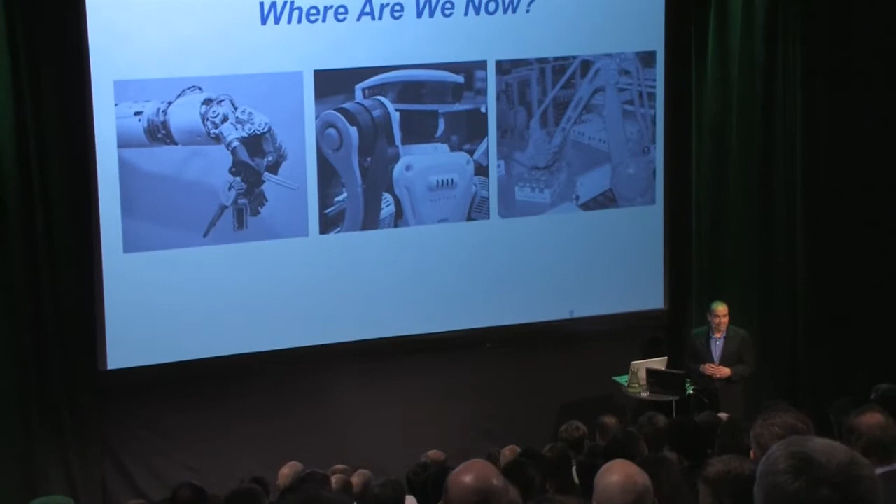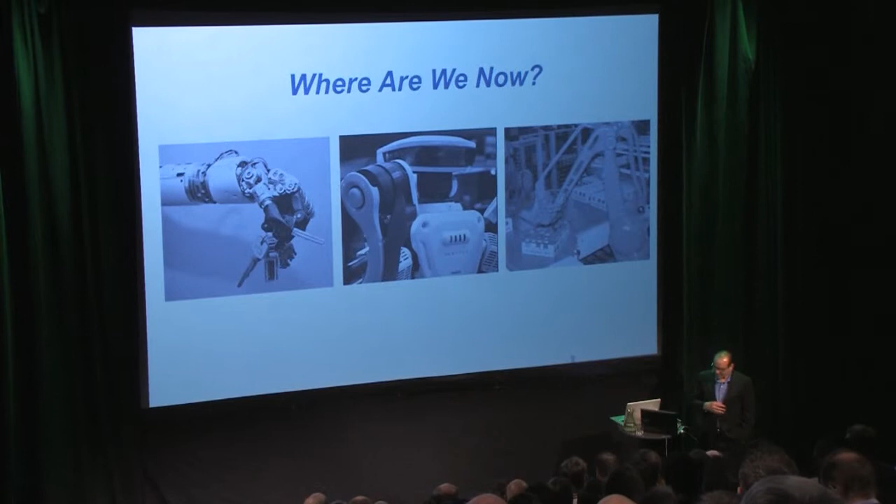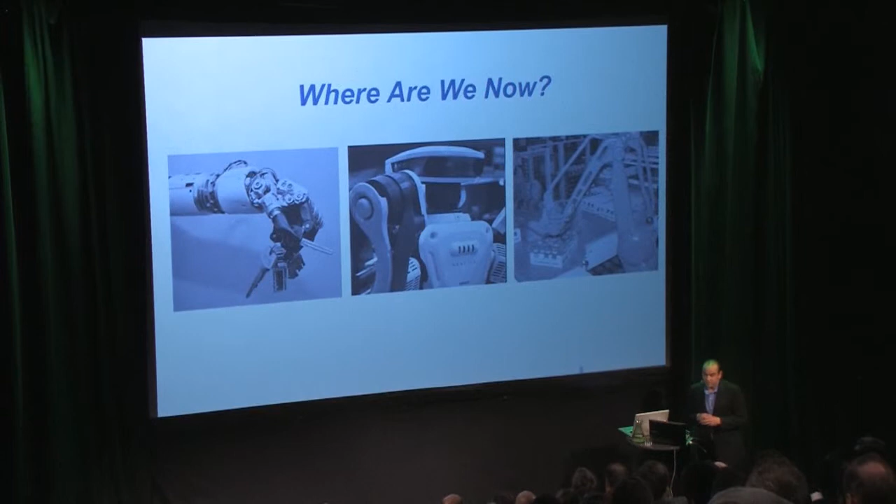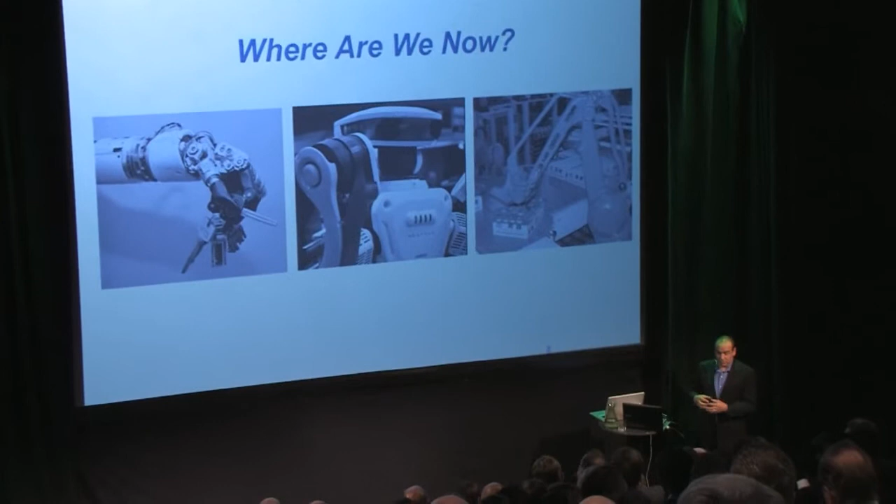So in the next 20 minutes I'll give an overview as quickly as I can on the complete robotics industry. Where are we now? I titled that after a song from the latest David Bowie album, because he's a bit further along in his career, and robotics is similar in that sense. It's one of the few areas of technology that's extremely immature yet has been around since the 1960s. So how do you classify this? It's classified as an emerging technology and a mature technology at the same time. Given I want to do this in 20 minutes, let's get started.

I want to talk about four subjects here. Where are we right now with respect to robotics? What are the enablers? What can we expect in the near term? And then finally, the visionary stuff, which I'll cover in two slides.

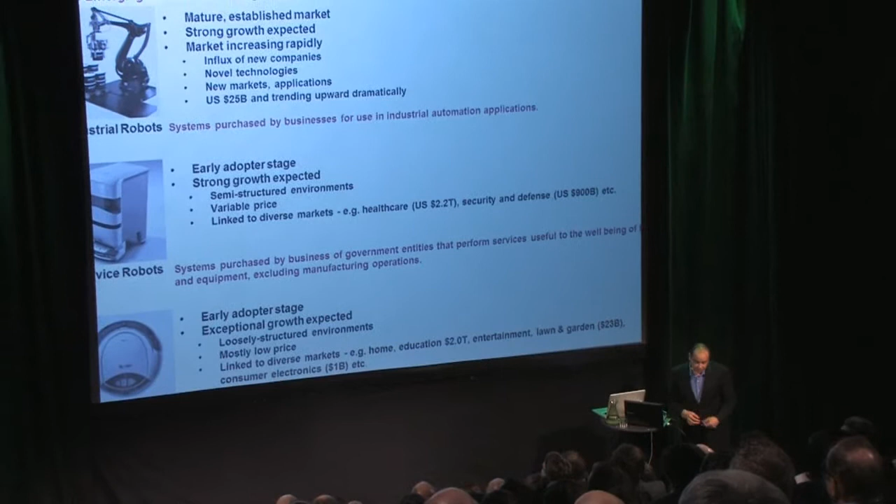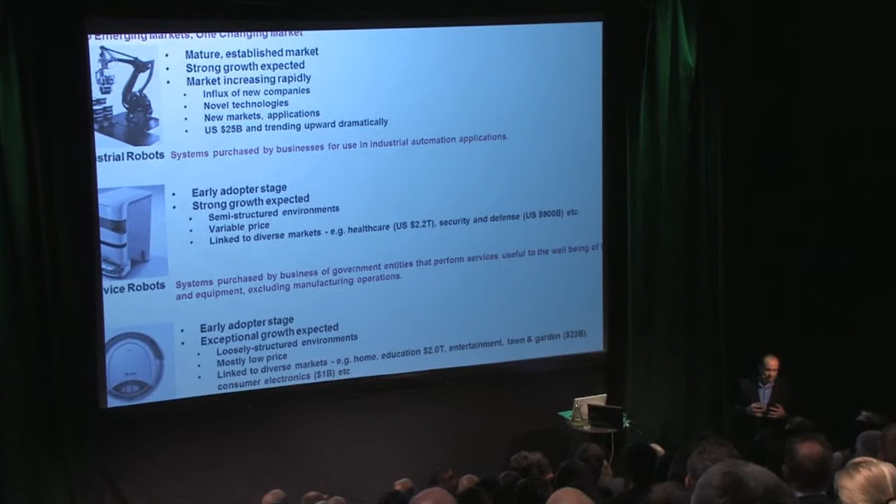So what's the current state of the robotics industry? Before we talk about that, I'd like to provide a taxonomic framework for this industry. Some people here may not be up to speed on where the robotics industry is right now, while others are experts, so I'll try to provide a little of everything. I apologize if you've seen a taxonomy like this before, and doubly apologize if some of this gets a bit technical. So I'm kind of stuck in the middle here.

Really, the marketplace has historically been broken down into three different groups - looks like we're cut off a little bit - the industrial robotics sector, the service robotics sector, and the personal or consumer robotics sector. The uppermost one is a mature marketplace, around $25 billion at this time. That's not a whole lot of money compared to, say, healthcare at $2.2 trillion in the US, or manufacturing, which is a very large marketplace.

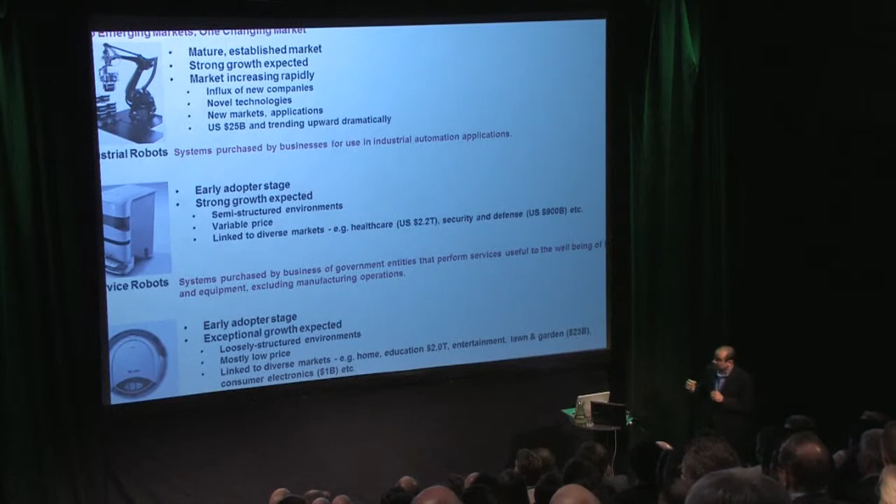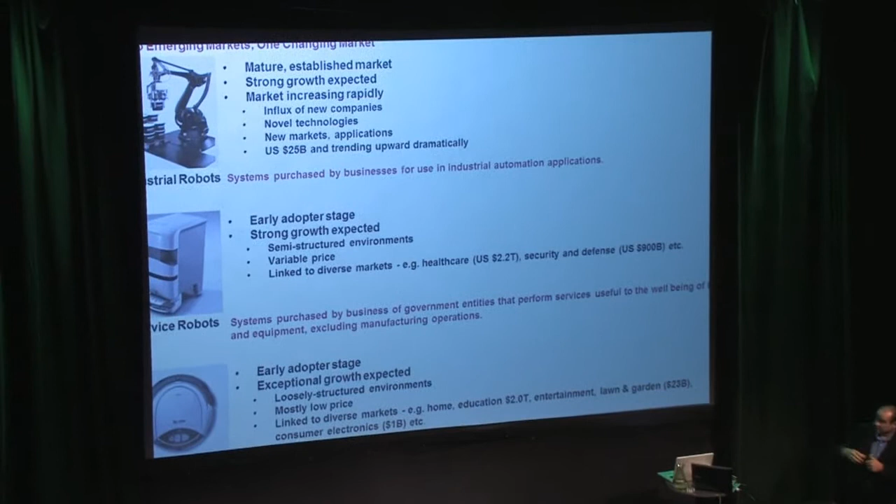Then you see the service robotics sector - robots in semi-structured environments. They're maybe not in a structured manufacturing environment, but they're linked into things such as the healthcare marketplace in the US at 2.2 trillion - you can convert that to euros, it's a big number. Security and defense are the same. And then down here is the early adopter stage, the personal robots - these are robots purchased by individuals, typically for use in the home.

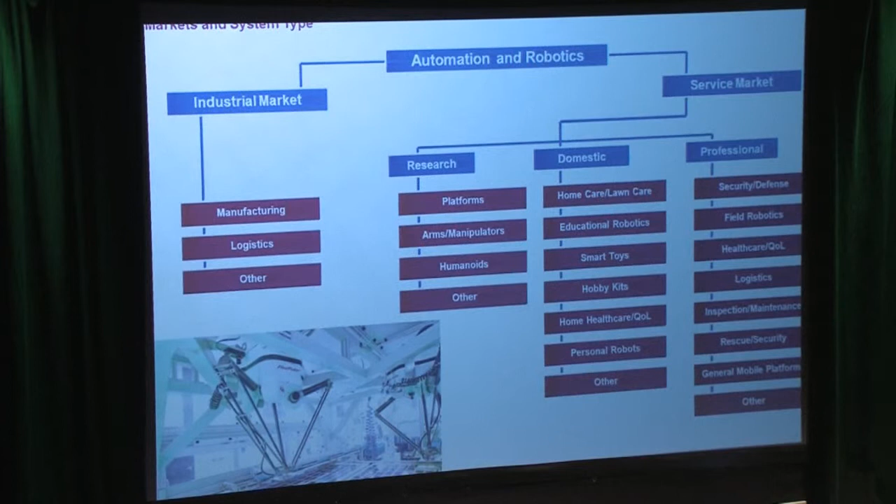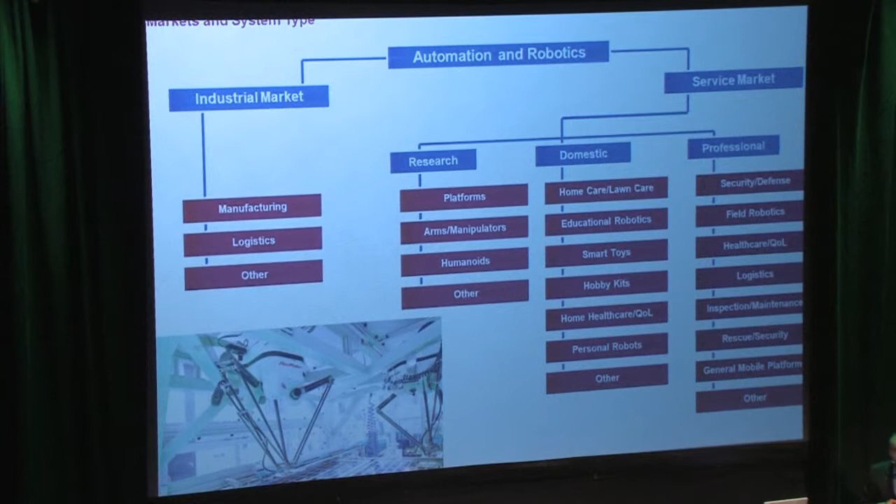Another way to look at this, you'll sometimes see it broken down into two marketplaces: industrial and service. Here's professional service robotics with security and field robotics, health robotics, and domestic robots, again used mostly in the home or by individuals. And then there's research robotics, focused on educational robotics and robots used for primary journal-based research. In the previous slide I said that's only the beginning, and that's right - we'll get back to that on the last slide.

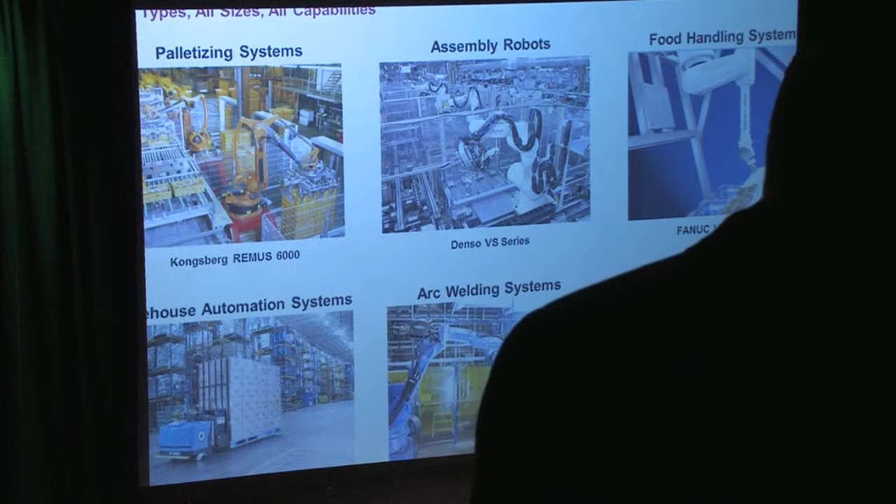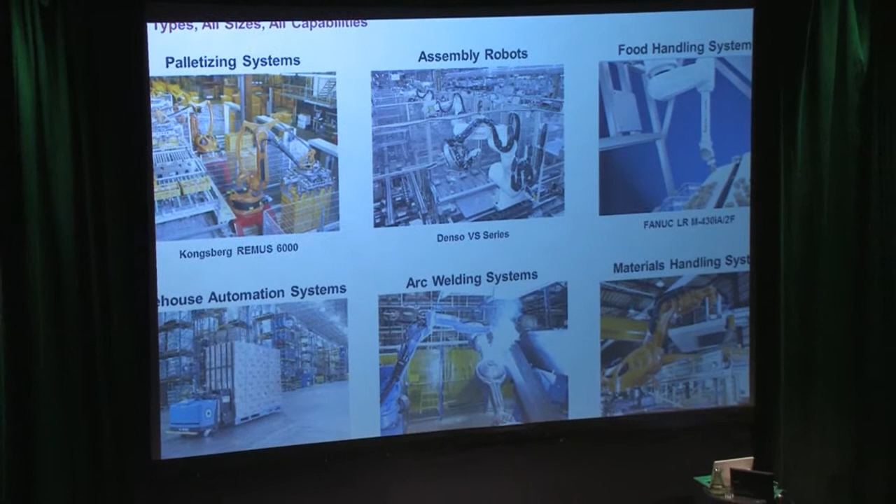So, the industrial robotics sector is moving in a number of different ways. We have more traditional arc welding systems, and the emphasis now on the largest component of the manufacturing industrial sector is materials handling - there's an example of it here. They've moved into two new vertical marketplaces, such as food handling with robotics, so robots can be cleaned with caustic chemicals and heated to very high temperatures. Assembly robots are now moving down to assemble smaller items, so more consumer class assembly and manufacturing, palletizing systems, and now warehouse automation systems, which we saw some of yesterday at ABB - they're located throughout the world. These are vision-based systems; none of them are running along tracks, and there's no planned path.

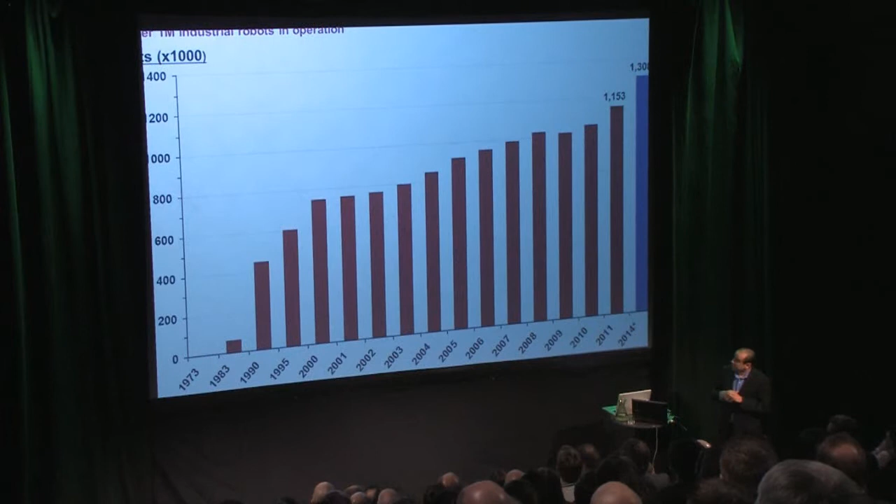I promise not to go through too many of these slides. Basically, the marketplace after the recession is on a huge upswing - 2011 was the fastest growth since 1961, according to robotics data. The number of industrial robots worldwide is around 1.3 to 1.4 million at this time.

But where are they going now? You have an industry that's been limited to a large degree to the automotive sector, and for their own protection as companies, they need to branch out from there. So they need to move into other types of marketplaces. What can we do outside automotive manufacturing or electronics manufacturing? So they've gone in a number of different ways. They've expanded the base to move into non-traditional vertical market segments.

You see an example here of something in the food industry. It's cut off a little bit, but that's cutting a hog in half. They've moved into small to medium-sized enterprises to do things like fine assembly. On the upper right-hand side, there's a Denso robot actually putting together cosmetic cases. This is a vision-based system, very fine manipulation, trying to do lower cost pricing, and they bundle things together.

So they're moving out into new marketplaces, and certainly with geographic expansion, typically in Southeast Asia, as well as Asia proper, adding things such as fine manipulation, vision-based systems, sensing, and now mobile manipulation.

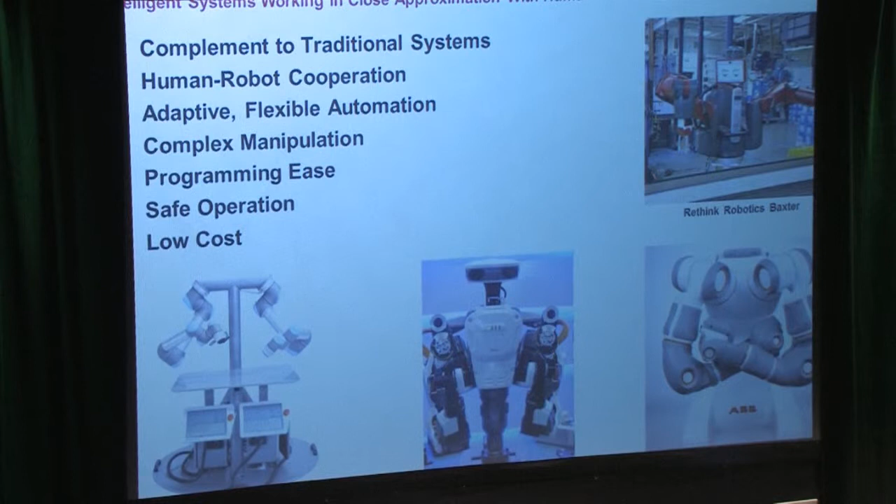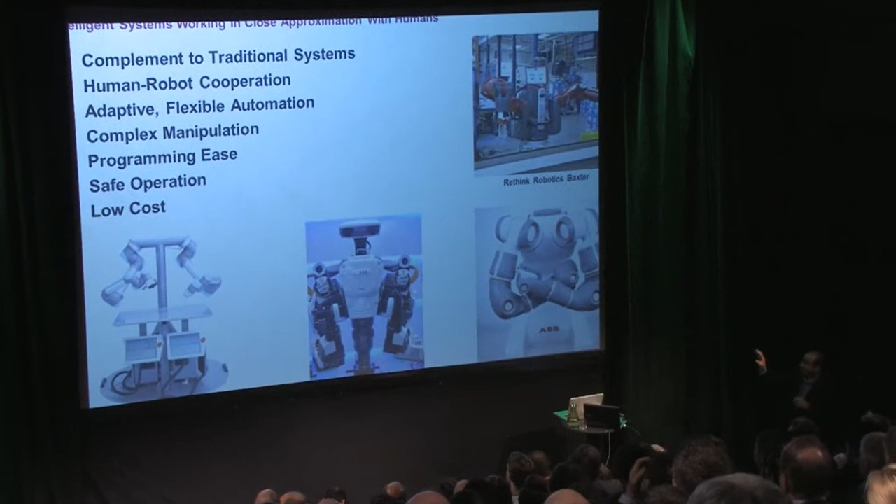And now we've moved into a new class of robots as you try to move into the small to medium manufacturers, a vastly underserved marketplace. Typically, even when these companies go into new vertical market segments, they're with big companies. But in total, in aggregate, it's the small to medium manufacturers which are in fact a larger part of the industry. So now we've come out with a number of different systems.

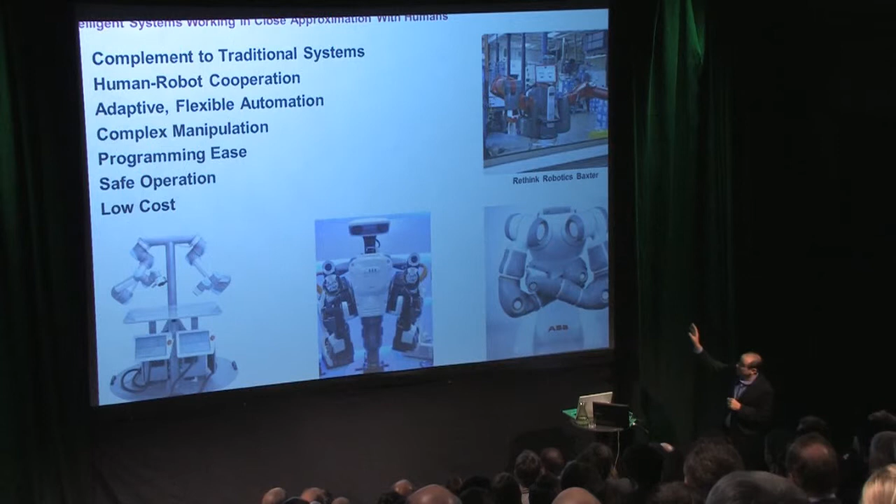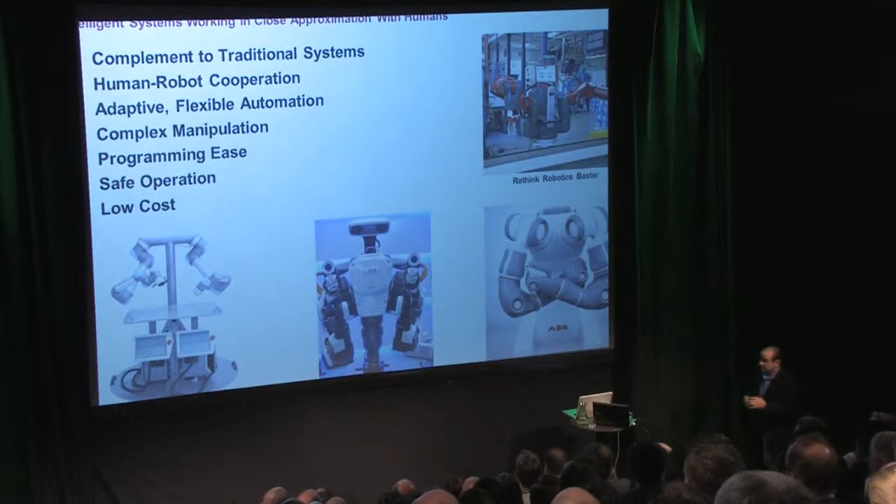The names are cut off here. This is Kawada in the middle, Kawada's Cobot. People might be aware of ABB's Frida systems, Rethink Robotics' Baxter, which was launched last November, and off to the left-hand side, I believe that's Universal Robot Systems. You'll notice the form factor is very similar, it almost looks human, they're dual-armed. Many of them are designed to work in close proximity with people, be very easy to program, and very low cost in order to get these into new types of marketplaces.

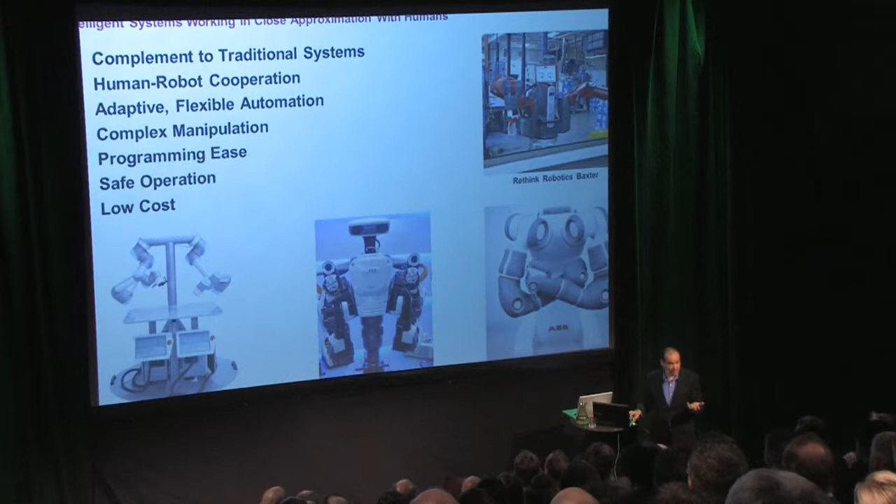So a new class of systems for new types of manufacturing. Typically a small to medium enterprise might not even know what they're manufacturing, and they certainly don't know how many they are, and they have rapid turnover in terms of what they're producing. So it's very different than the automotive or electronics manufacturing industry.

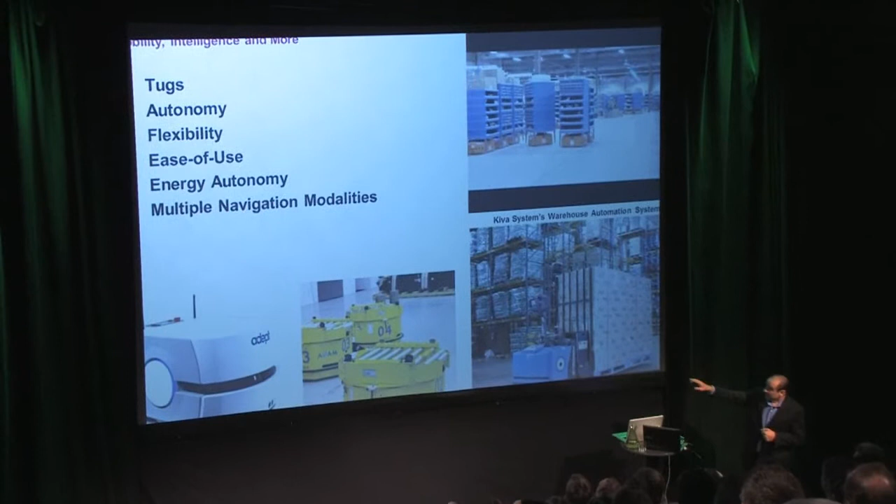Another class of systems here would be these new mobile platforms. We have tugs, we have one from Adept, here's the Seegrid Systems. I apologize for this being cut off here, but you can see up in the right-hand side, that's Kiva Systems, warehouse automation systems, a very well-known system, largely because Amazon, who funded that through Jeff Bezos's funding wing, went out and purchased it for $750 million just north of that last year.

So this finally woke up the investors in Silicon Valley, who now realize that robotics has arrived. This individual tried to get funding in the Valley and couldn't do it, had to move to the Boston area to get that done, but it was invested in by Amazon.

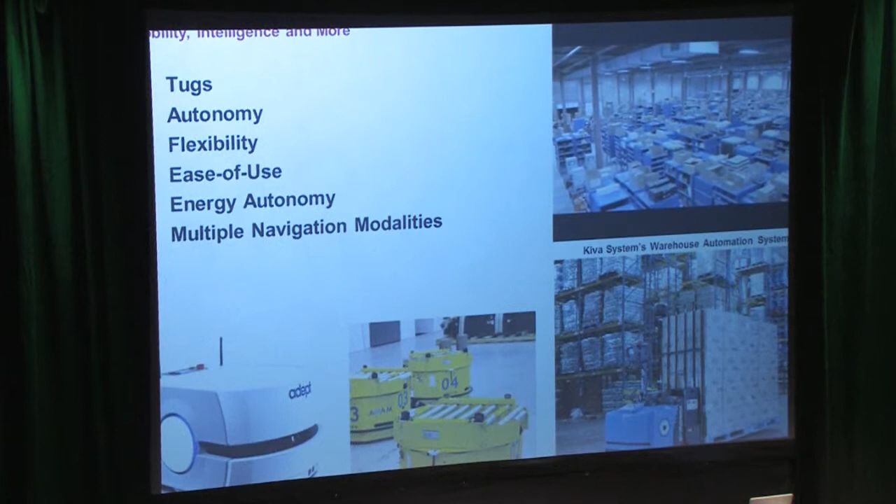So they're looking now to take Amazon, for example, to give you same-day delivery of packages, and this is the way that they can do it in a way where they can make money. You can see just literally hundreds of robots moving out throughout a warehouse. That might be Zappos, or it might be another place here. They just actually pick up the material and bring them to people who pick them and then put them in trucks.

So past the industrial sector, let's move into the professional service sector, or just the service sector in general. You reach a point where if you're going to taxonomize this marketplace, it's very difficult, because the way I describe it is more than stars in the sky. We're actually kind of missing part of the presentation up here, but there's just many classes of these types of robotics products. So let's take a look.

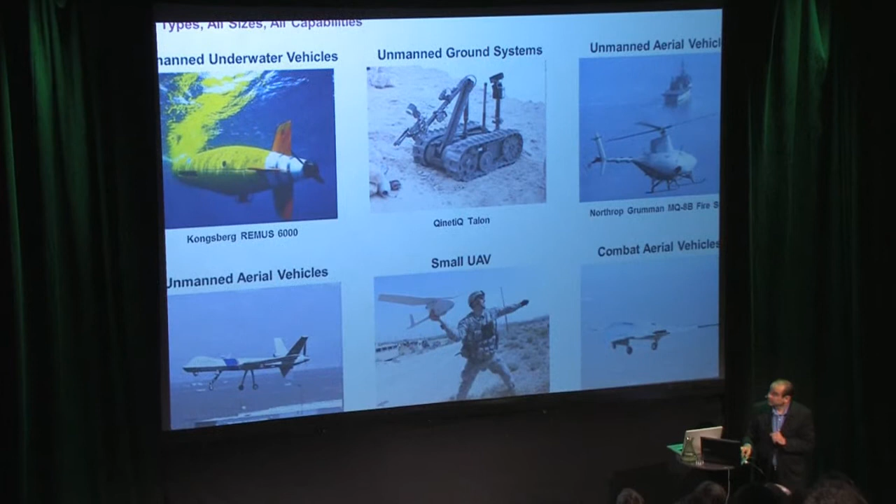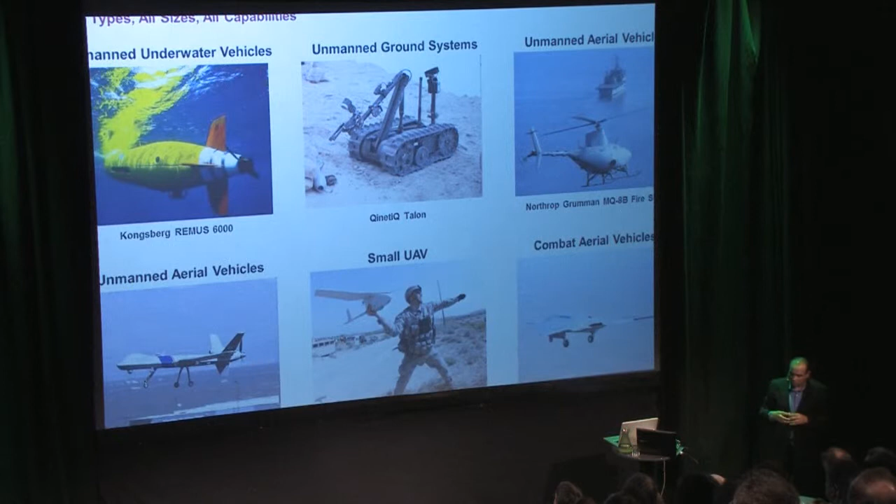So I know that Robotdalen isn't focused by defense, but the point to be made is that these were funded, and now that defense spending, at least in the US, is tapering down, these are being repurposed in whole new ways, commercial ways and humanitarian ways. We'll talk about that in the next slide. Again, well-funded, literally unlimited amounts of money, moving now into the commercial space.

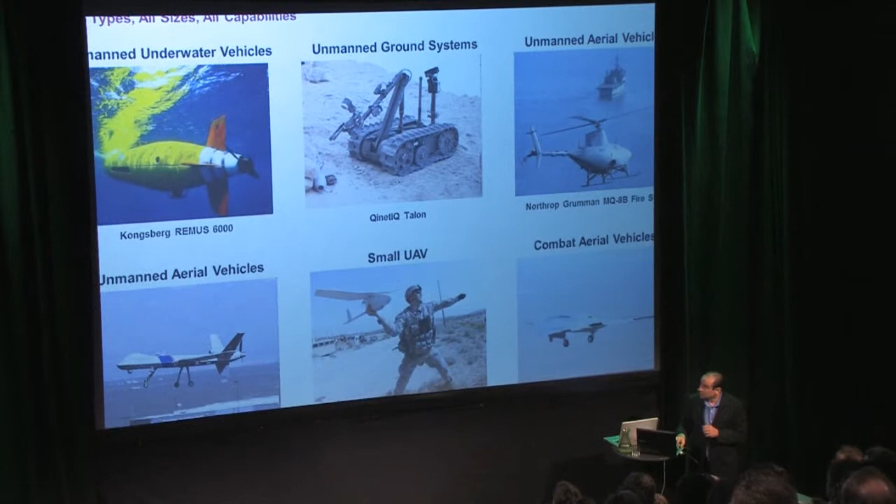Examples of this include moving into environmental monitoring, infrastructure analysis, and search and rescue robots. It's very telling, for example, in the Fukushima disaster in Japan. Here you have a country, Japan, well known for robotics. You really have to commend them on the beauty of their design, the elegance of the vision. The engineering, of course, is fine. But when that happened, they didn't have robots they could use to go in and monitor the situation. They ended up using military class robots from the United States that have been proven in the field. We know they work, they're very robust. And that's telling.

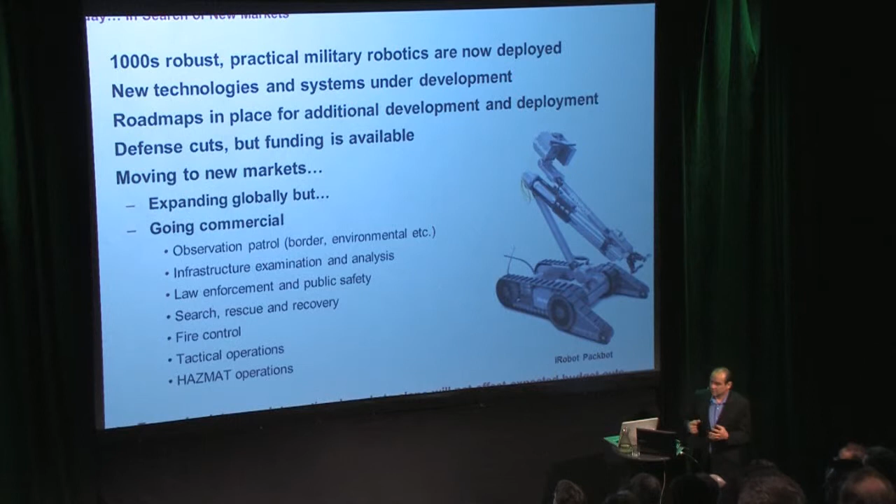So they're moving in different areas in terms of defense spending and security spending. You can see many of them up here.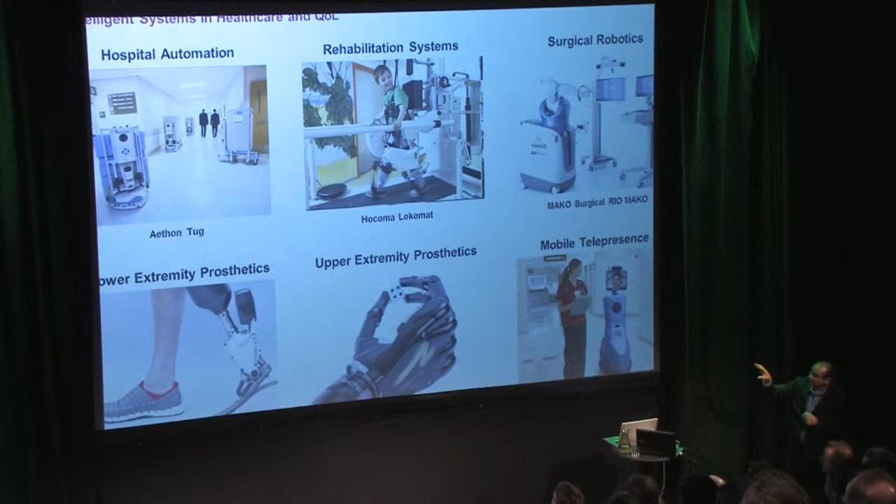Let's look at healthcare. Some of this stuff is a little cut off here, but you can see we're investing in real robots selling for real money in real companies targeting the healthcare marketplace. And it's not limited to only surgical robots, which is typically where many people are focused now. So things such as...

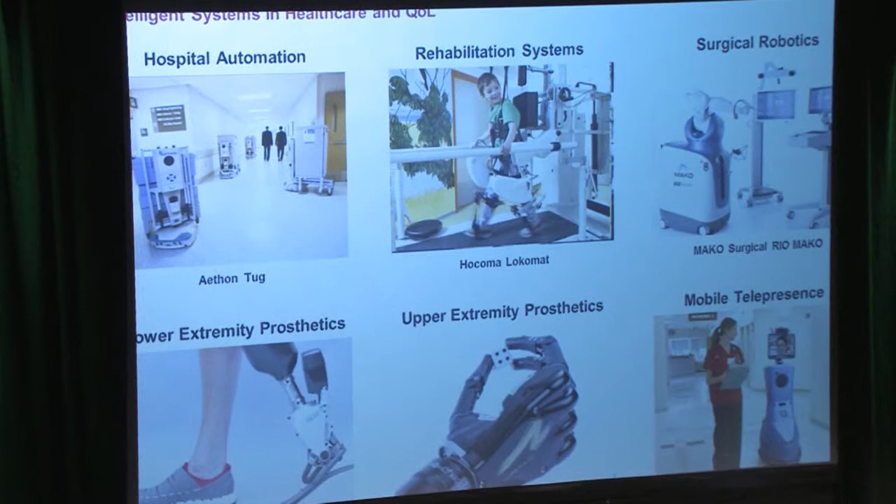Rehabilitation systems with the Lokomat. Aethon's Tug is a hospital logistics and delivery system out of Pittsburgh. Upper extremity and lower extremity prosthetics now—some of this funded by defense funding, others coming through the healthcare field and the National Science Foundation in the US and the equivalent in Europe. So again, real companies making real money.

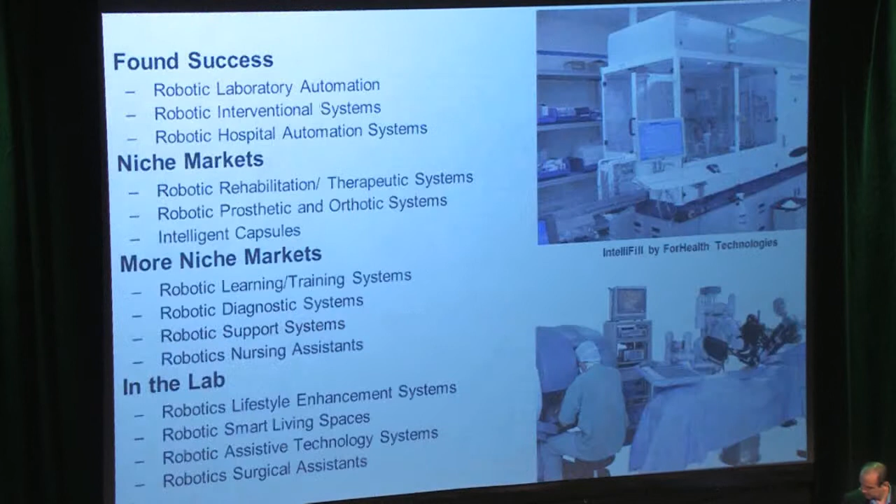Where are we now with these? There's been a number of major successes in the healthcare field with respect to robotics. Probably the best well-known is Intuitive Surgical in the interventional systems marketplace, surgical systems. But it's not limited to that.

So dispensaries in terms of drugs within hospital environments—again, logistics and delivery systems. Other marketplaces doing fairly well, although a little more rarefied and smaller, include rehabilitation robotics and therapeutic robotics. Some of these are even more niched. And finally, down at the bottom, I've listed some things just coming out of the labs now: smart living spaces, a lot of quality of life robotics, teaching systems, educational systems, and the like.

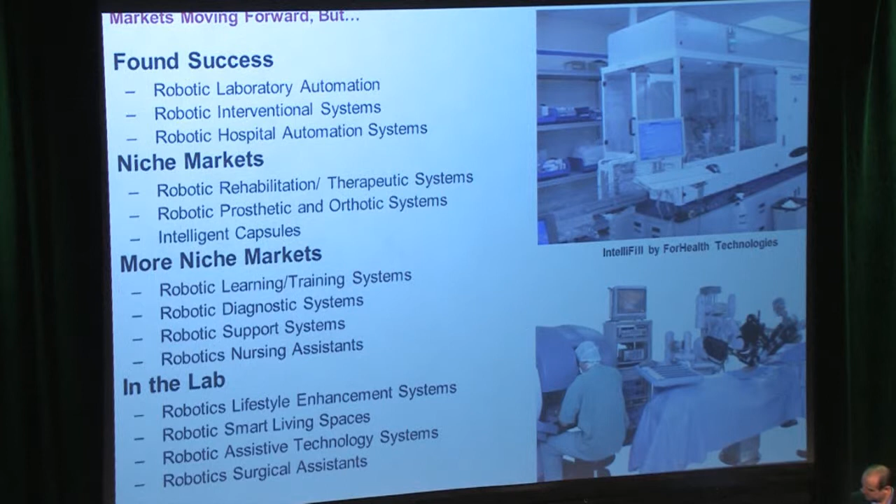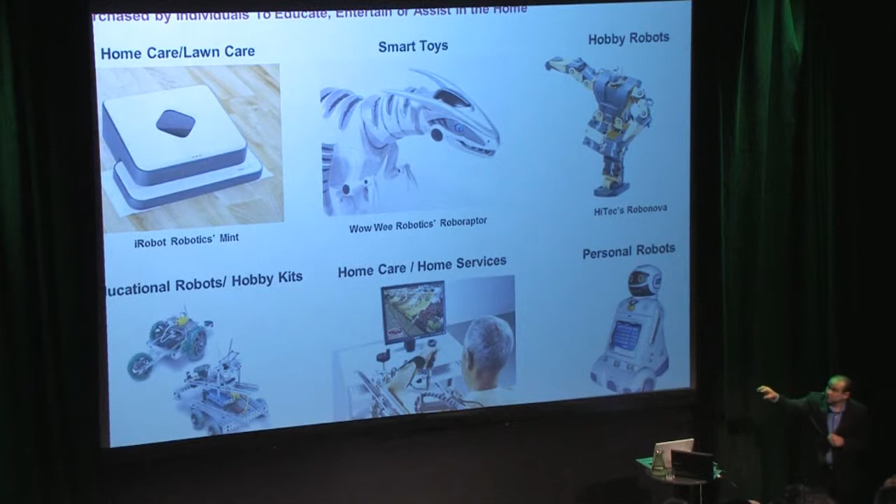They break it down, the IFR does, into domestic entertainment. There's another way to break it down, and this is the way I do it here: home care, lawn care, which in the US is a $23 billion marketplace. The toy industry worldwide is $83 billion, and robotics is now trying to move from toys, from the virtual world or even more traditional toys, into things like this.

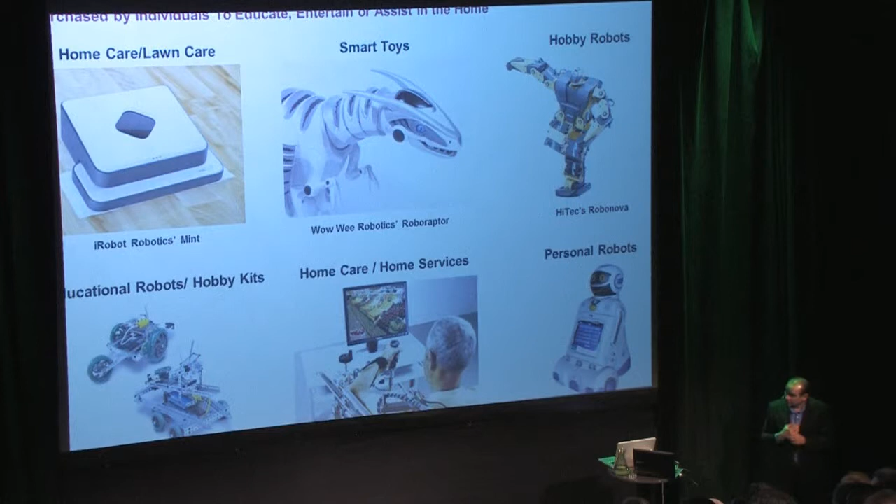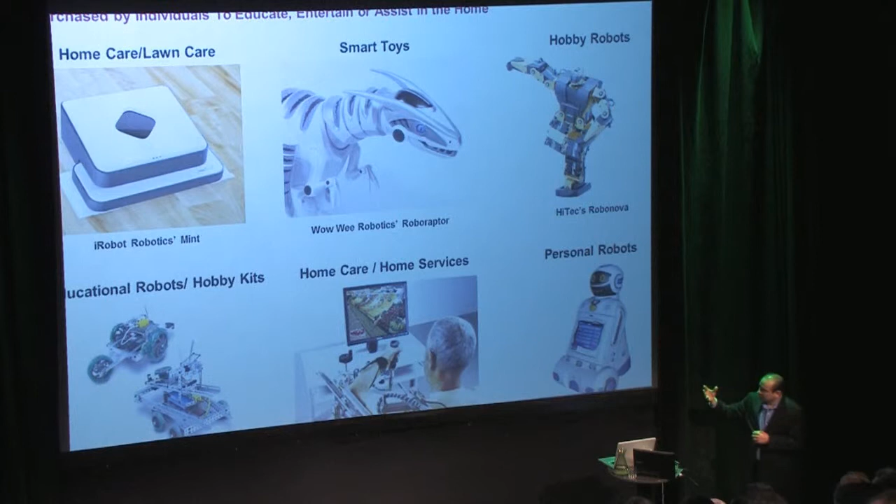Hobby robots, educational robots—a fairly large marketplace—and then these home care, healthcare, quality of life robots. These might not be paid for by individuals; they might go through an insurance company or through the government, depending on where you live, for use in the home. And then personal robots are on the very cutting edge. This is a robot out of Korea.

So where have these things been at this time? Well, basically, the example I use at this time, they just tend to be getting a little bit better. There's not massive breakthroughs on these things.

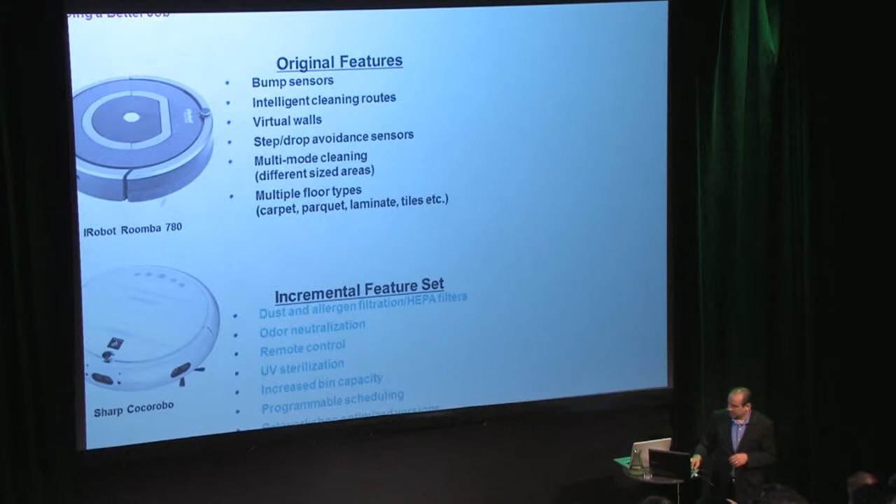So here's an example of iRobot's Roomba. The next generation of systems added other things. For example, you could filter out dust, and they would have HEPA filters, UV sterilization with a little light. They got better at bumping into things. You could schedule them, and finally you get automatic docking. So again, it's the same system, basically a little mobile robot dragging around a sweeper. But over time they've just added things, so now they've added cameras, a lot of consumer electronics stuff, natural language processing.

That marketplace is expected to be the dominant marketplace at some point, but it's not really there yet.

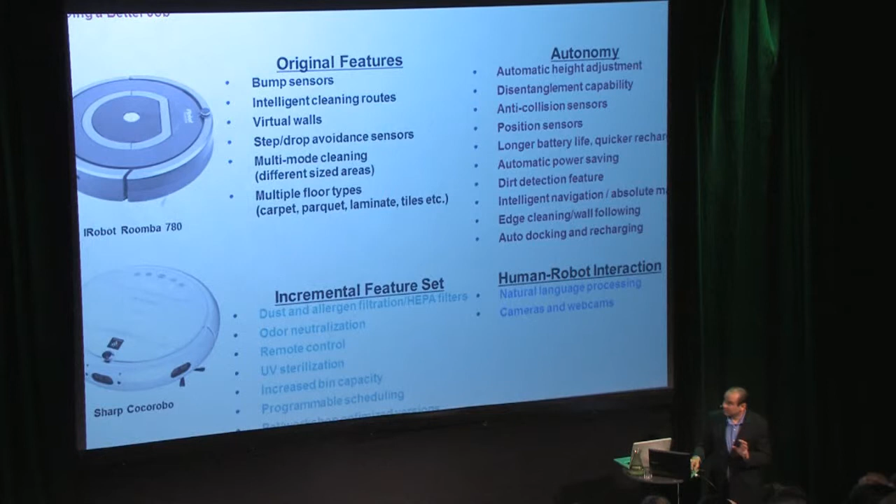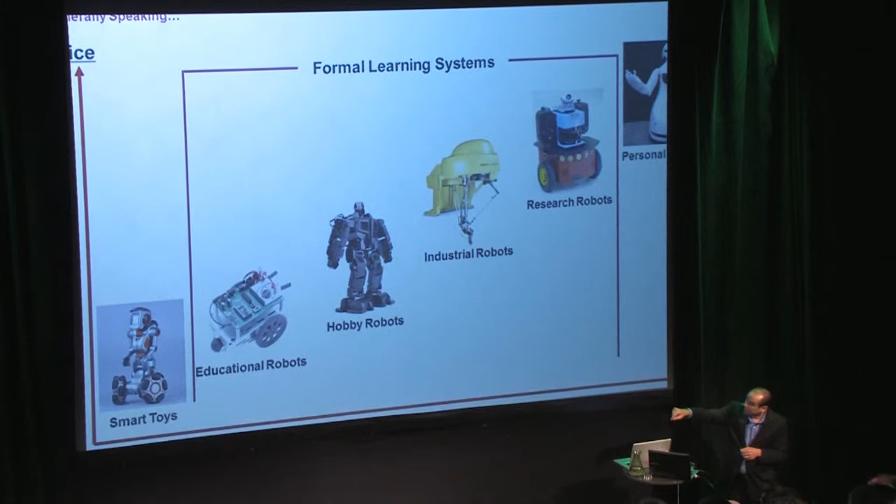Then with educational systems and research systems, I break them down this way: education versus research. And examples of types of robots here. On the right and left-hand side, that's basically cost, and then complexity. So you can see we've moved up from smart toys to educational robots, and the ones in the middle here are kind of formal learning systems linked in with formal learning structures.

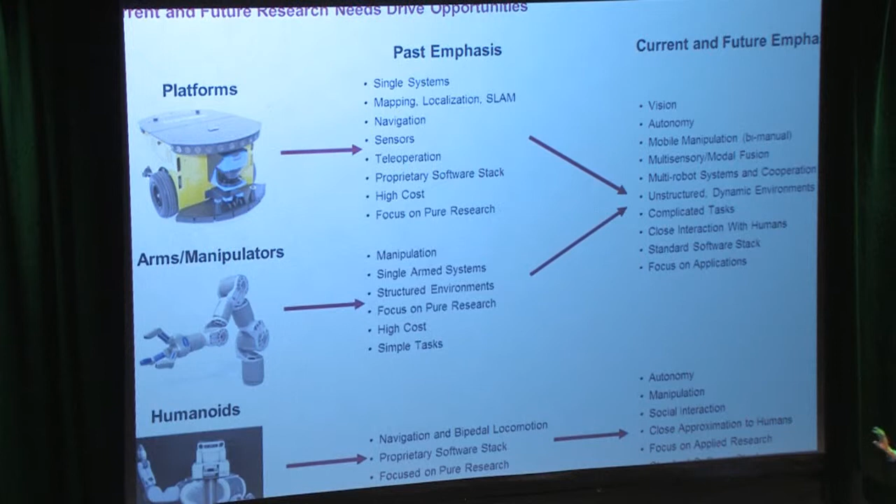The three classes of research robots here have moved from the past environment to focus on single robots that you would program, difficult to program, to adding more autonomy, manipulation, social interaction, and groups of robots working cooperatively.

Examples of things coming out in the future now. We talked earlier about the Cyberdyne system that's being used for some other things that are in the field now. Some are very research-based, like some of the autonomous transportation and some of the field robotics.

Those on the left, an oil exploration robot, where they can actually drop the whole exploration outfit and cover the size of a house on the ocean floor, and the robots work inside a sealed environment so no oil gets leaked out, and they can drill for oil.

And then certainly mining robots, mostly used in Australia, but also parts of Asia. These are giant autonomous vehicles, the largest trucks in the world now, with no drivers.

An example here is a defense system, this is out of Boston Dynamics. Big Dog, many of you have probably seen this type of film before. Now they follow them, and they look a little bit more polished now. I don't know what the advantage of this is over a mule, because now they're trying to find ways where they can actually get energy into it. And it's walking by fields of grass.

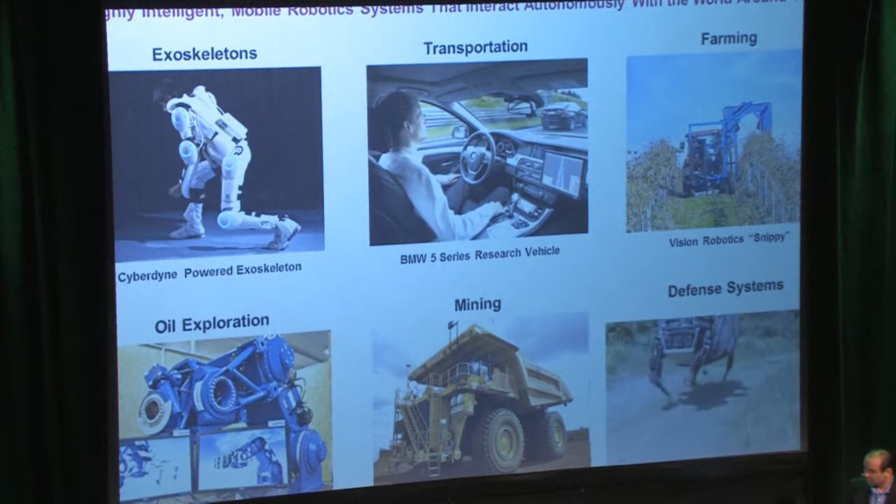Robot enablers: robot operating system, cloud robotics, cheap technology, pervasive computing, Moore's law. I'm going to go through this pretty quickly.

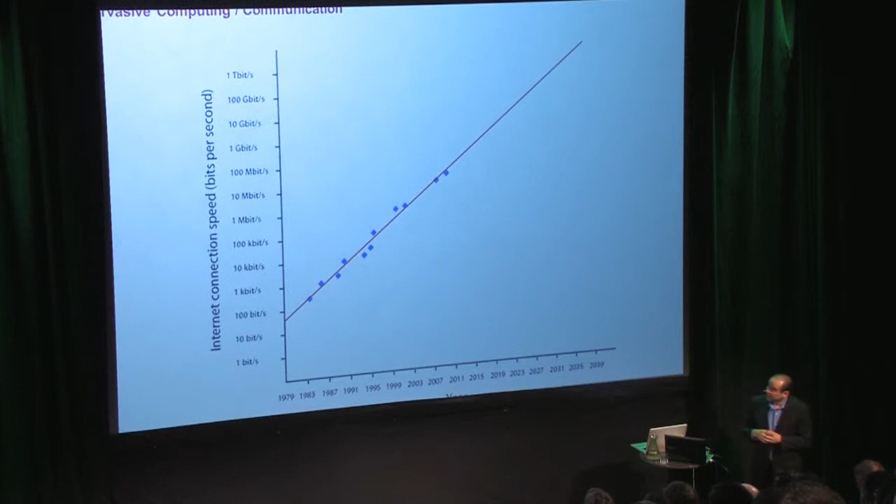An example here, a quote by Eric Schmidt, and he's correct about that. What happens when you have unlimited processing power with unlimited network bandwidth, with smart sensors everywhere that are cheap and ubiquitous? If you look at cell phone uses, basically we're getting to the point where there's going to be more cell phones than people for controls. When you talk about internet connection speeds, again, moving up very quickly.

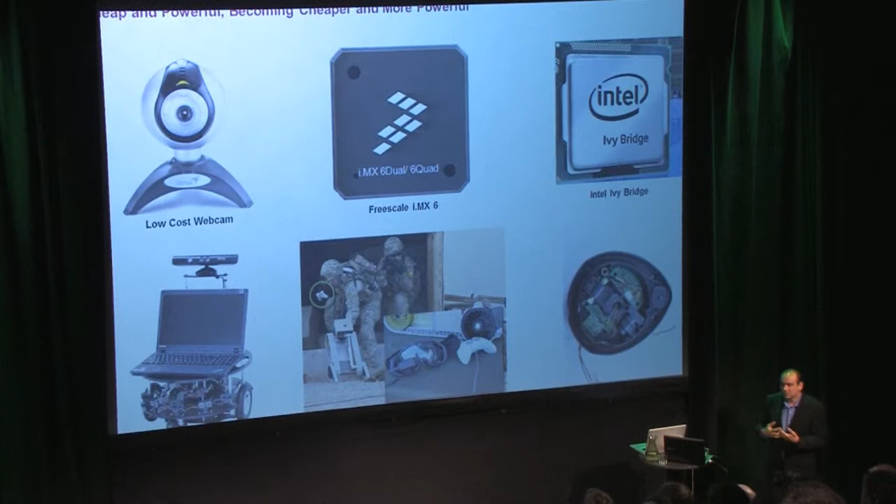I know I'm going through this fairly quickly here, but I wanted to cover it all. Moore's law, of course—again we're kind of cut out a little bit, but you can see the progression here, quicker computation. And then I think it's important to note COTS technology, just cheap off-the-shelf technology and componentry that can be used in ways to create very powerful solutions.

Here's an example of a LiDAR system built into a Neato robot, this is out of California. They actually have like a $40 LiDAR system inside the robot.

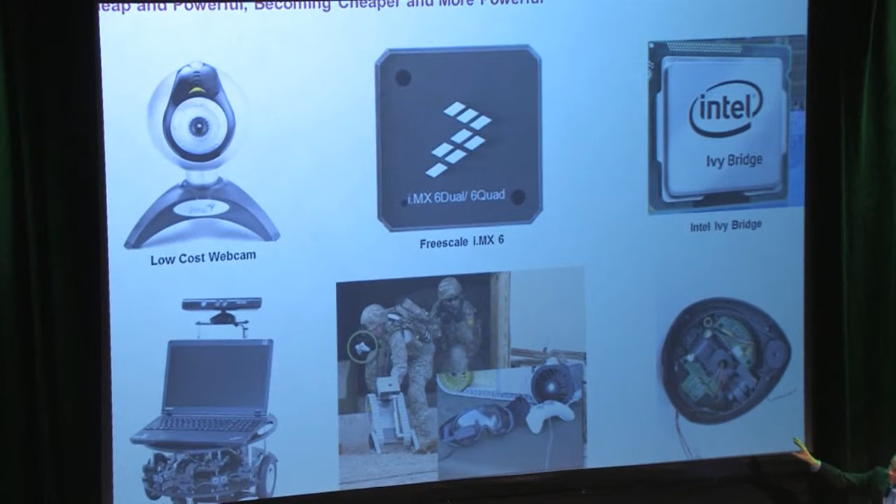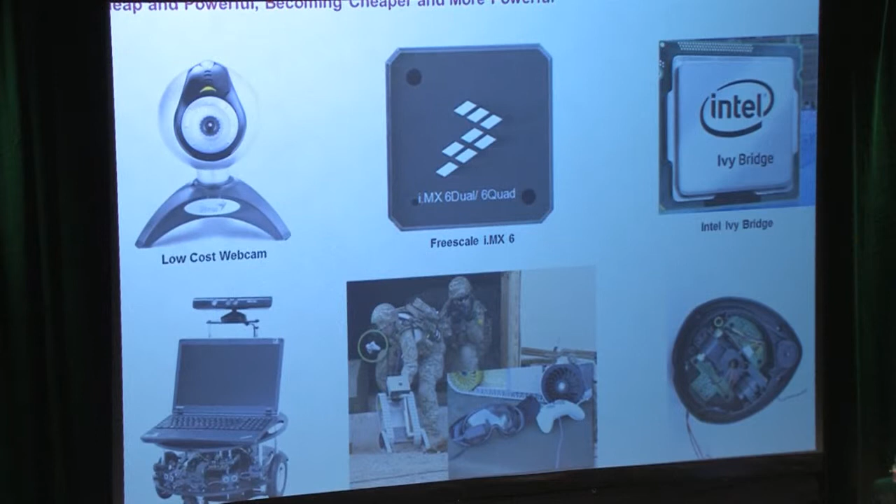Off to the left is an example of Microsoft's Kinect. Here's two people using an iRobot PackBot. They give the Marines now controllers for games because they're more familiar with that if they're 19 years old. And then, of course, the chipsets, which again keep getting quicker, more powerful, less energy usage, more robust.

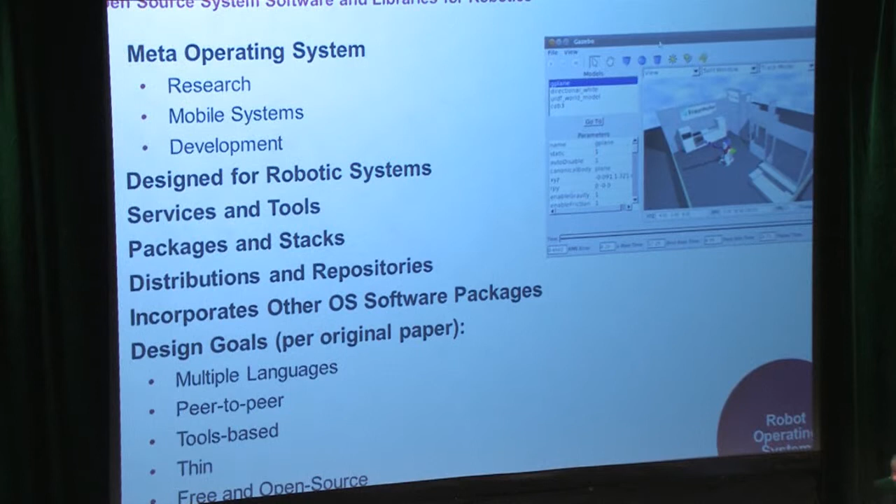This is a slide for robot operating system, an operating system that can be used both in service robotics, consumer robotics, research robotics, and now moving into the industrial space. So there's work going on for this for years. It needs maybe more of a commercial polish to it, but that's happening.

And then areas such as cloud robotics and cloud computing move down into robotics. So for example, that amount of processing, even no matter how powerful the chipsets and no matter how cheap the processors are, you would have unlimited processing if you bring that up to the cloud and computing. And of course, the robots can download the latest software, all on the fly.

So again, cloud robotics is a big effort underway, particularly in research, and that's moving forward into the commercial space, although tentatively. And here's some examples of robots using cloud robotics functionality.

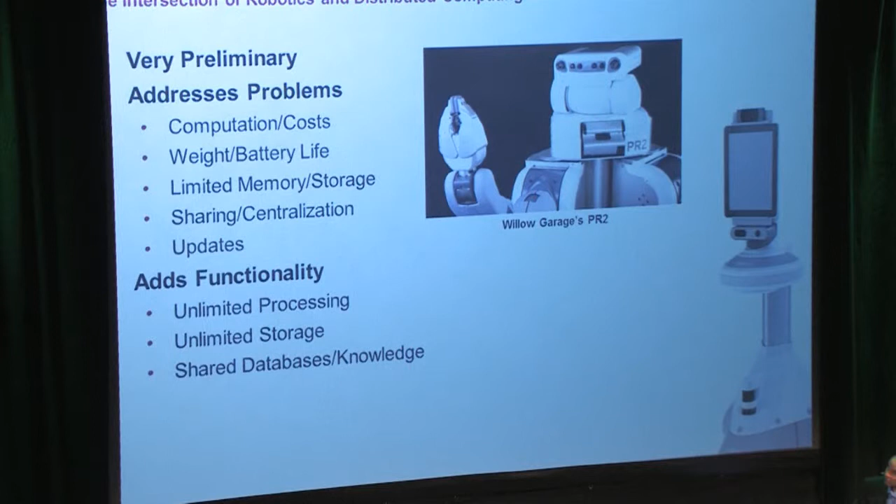You have regional robotics clusters. Robotdalen is one of them, DTI in Denmark is another, Osaka City, Tokyo, Seoul, Boston, Pittsburgh, Silicon Valley, Munich, Paris, probably the major ones, parts of Spain as well, and Italy moving up as well.

There's a number of political and social drivers pushing this: aging population, baby boomers who have a lot of money and a lot of political clout. There's government initiatives in Europe, in North America finally, outside of defense, and certainly in Asia. So a lot of things happening at this particular time.

Overarching everything is the notion of autonomy, to give these robots more of an ability to decide for themselves. It's not autonomy in the way the ancient Greeks meant it, and it's not autonomy like biological systems, but it's robotic autonomy. So it can perform tasks in a certain way.